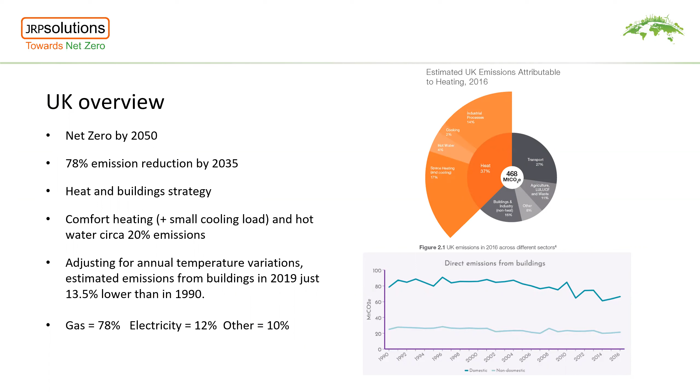As you can see, we've got a long way to go, particularly as gas is used for the bulk of heat, with electricity accounting for 12%. Gas accounts for 78%. So gas is the big challenge here, I guess, to try and displace that. Next slide, please.

So heat is either in scope 1 or scope 2, i.e. self-generated source of heat. Steam or hot water boilers would be scope 1, whereas bought-in heat would be, for instance, from district heating schemes. Heat used by an organisation's suppliers, however, would be part of that organisation's scope 3 emissions, i.e. it's their suppliers' scope 1, scope 2, but it is your own organisation's scope 3 emissions.

We would say this anyway for anyone considering investment in any sort of capital project: look at system optimization and energy efficiency measures before diving into investing large sums of money in capital projects. And when you're considering any technical solution, you should very much take into account the impact on your own net zero journey and your ability to achieve your net zero ambitions.

And lastly, I would say there are no silver bullets. We had a conversation yesterday with a large paper manufacturer who very much was pinning his hopes on hydrogen being their silver bullet. But in our view, and I'll leave Barnsley to talk about this in a little more detail later, we're quite a way away from hydrogen being that silver bullet. So you have to deal in today's realities, what's practical and what's going to actually work in the next 5 to 10 years, whilst keeping an eye on emerging technologies, of course.

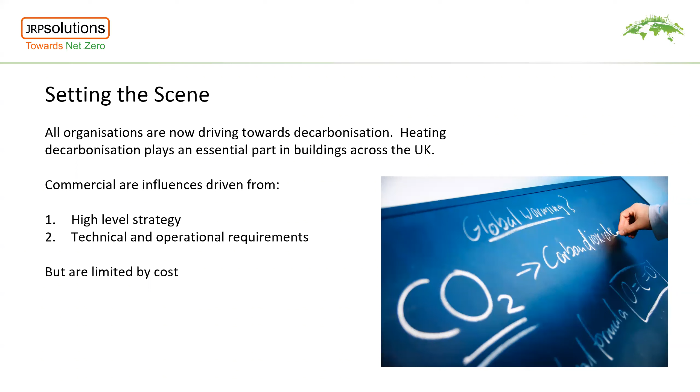As we've heard from George, all organisations are now driving towards decarbonisation, and heating, be it for industrial use or commercial space heating, is going to play an essential part across the UK and a challenge to all organisations. In making those decisions from a commercial perspective, there's usually two influences or drivers. One is high-level strategy, driven down from the board level through an organisation to demand certain aspects and returns. The second is more practical, ensuring that technical and operational requirements are being delivered. But in the context of decarbonisation, and any change in investment, there's always a limit to cost. Next slide, please.

So from a high-level strategy point of view, most organisations have started to go on the journey to net zero and set various targets. In reality, a lot of organisations have already set targets in terms of reducing carbon, challenging how people operate their plant and equipment to generate heat. The strategy will also largely dictate: we need to make cost reductions, we need to make savings, how can you improve performance? And at the same time, it's improving compliance and maintaining security.

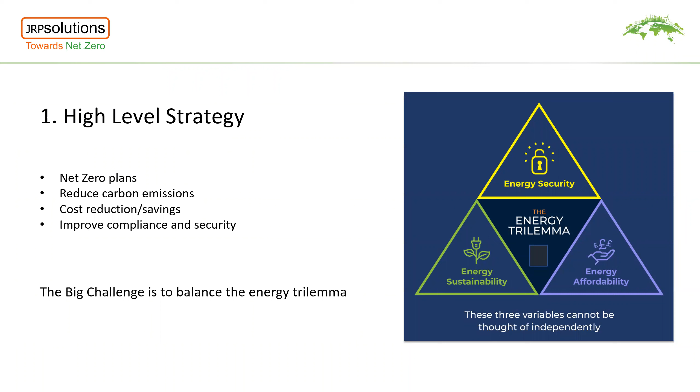So all organisations from a commercial perspective certainly have big challenges ahead, especially trying to invest in low carbon and decarbonisation technologies, while trying to balance the energy trilemma of maintaining energy security, energy affordability, and energy sustainability. Next slide, please.

In making decisions and operating systems, technical and operational requirements are key to any operating business, be it generating heat for steam or for space heating, always trying to improve operational performance to meet your high-level strategies. But there's going to be pressures to replace existing and aging plant, and decisions are required at that point. What plant do I replace it with? In the context of decarbonisation, it's important to think about how you replace that plant and equipment and how it impacts on your carbon emissions.

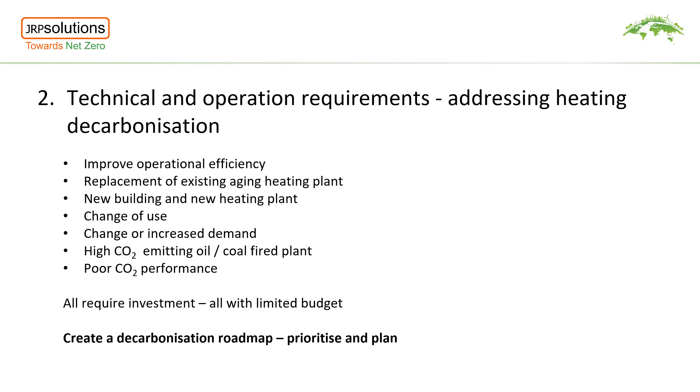At the same time, over the last couple of years, certainly during the pandemic, all organisations are now facing changes in heating demand, largely because of use of space heat and use of buildings. And so again, it all becomes a challenge. So what we suggest is you've got to create a decarbonisation roadmap so that you can prioritise and plan. I believe that's the best way to tackle this net zero journey. Next slide, please.

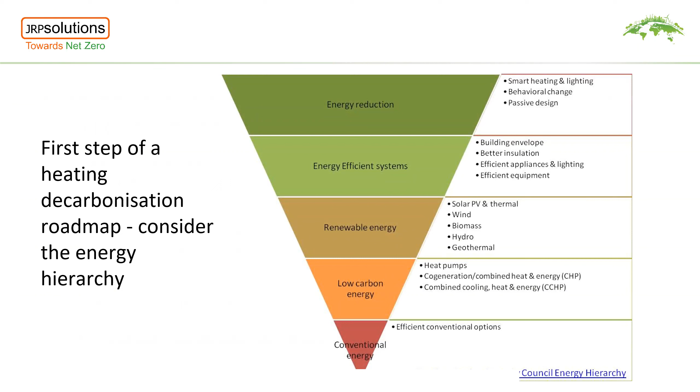So the starting point and the first steps, and as we've heard to some extent from George, is looking at the energy hierarchy. So optimising your use of energy within your buildings, within your industrial site, to improve performance by optimising, turning plant down, making sure your set points are set correctly, and reducing your energy consumption, therefore reducing your carbon emissions to an optimum such that you're matching your thermal demand that is required for your site.

The second step, obviously, is to look at improving efficiency. So in the case of heating in buildings, perhaps look at your building envelope, look at where you could improve the insulation, perhaps look at how you could improve maintenance on your plant and equipment to improve efficiencies, before going on the journey to invest in renewable technologies or low carbon technologies, which require significant investment, and ensuring that you get it correctly sized at this point in time. Next slide, please.

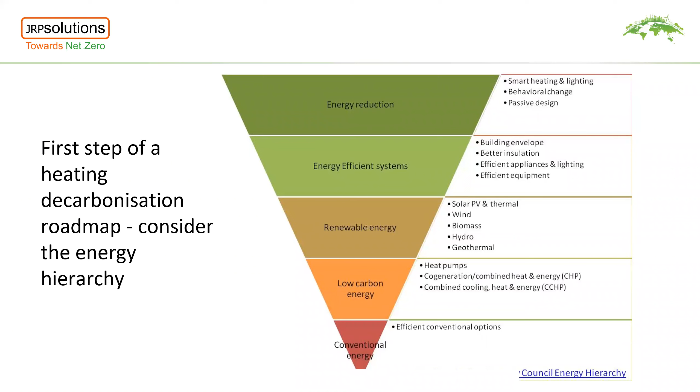So in order to optimise your decarbonisation plan, it's important to set out a plan and prioritise. And by doing this, it's important to assess and understand exactly what plant you have got, how it's generating its heat, how it's using its energy, so you can evaluate its CO2 emissions, set your targets and understand what your trajectory is. It's important to use metering information and monitor your consumptions over a period of time, such that you can make valid and sensible commercial decisions. Equally, it's also important to consider your future heating requirements, such that you can build that into any investment you make going forward.

By understanding what your current position is, you can start to prioritise. So you can start to improve your energy and CO2 performance, you can start to undertake those energy efficiency measures to ensure that you're not wasting your investments. And then you can look to replace the high CO2 emitters and replace your aging plant in an appropriate, planned and sensible manner. Next slide, please.

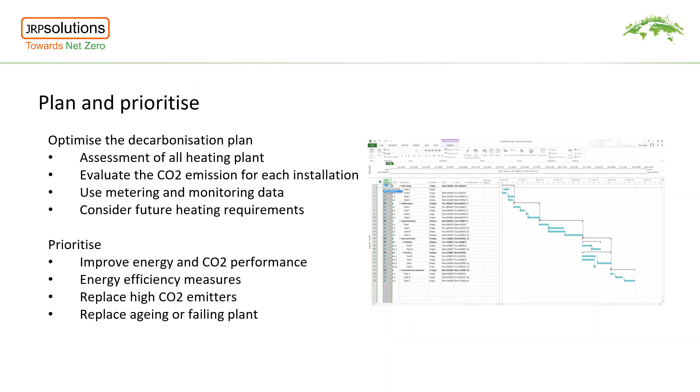What it is important to do, however, is to avoid the white elephant. We've seen a number of projects over recent years where the homework hasn't been done. Companies or organisations haven't fully understood what their heating demands are or their heating profiles, and as such they end up installing plant and equipment that in 5 years' time or even immediately is not fit for purpose, not meeting the requirement. Especially when you're starting to go on the decarbonisation journey, it's important to make those decisions with a full understanding of what you're doing.

Other aspects that are important to consider, especially with changing technologies, are the constraints and limitations. So make sure that if you need to obtain planning permission, you do so. And equally understand what your electrical supply capacity is, especially in the electrification of heat. There are going to be challenges or constraints on your supply capacity, which could cause you to increase your grid capacity, and therefore plan accordingly. In the same way, I've seen a number of projects where design and development has gone considerably down the path of implementation before someone's flagged up the fact that they haven't got enough grid capacity, and they've got to go back to the DNO and request further supply capacity, which clearly impacts on capital and time.

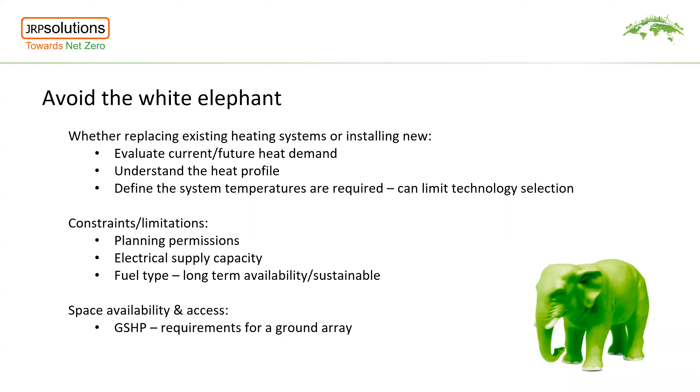Equally, the third point on there is if you're choosing something like biomass or biofuel and you're changing your boilers or your systems accordingly, ensure that you understand what your long-term availability for the supply of that fuel is. It's important that you don't install new equipment under a decarbonisation practice that ends up with no fuel in 5 years' time. Next slide, please.

So from a commercial perspective, and taking into consideration the drivers and the requirements of any organisation, clearly cost is the principal aspect. And it's important to understand what your capital budgets are, because they could actually dictate the solution that you choose. Because as we know, low carbon solutions tend to have higher capital costs than the conventional technical solutions that we're enjoying today.

What is also important, and we very much stress, is to understand the whole life cost of any project, such that you can build a business case, understand what the projected energy consumptions will be for the new technology, what the operational requirements are, and the service and maintenance. Things like biomass boilers, for example, will certainly require more operational input than perhaps a conventional gas-fired boiler, certainly for space heating. And in certain cases, if you're evaluating different technologies and developing your decarbonisation roadmap, it's important to sometimes set an internal cost of carbon, such that you can judge different technologies in that way.

Other things to consider, and we're still waiting for the government to really jump on board, but there are certainly opportunities or incentives and taxes. We know that in the public sector, there's the Public Sector Decarbonisation Scheme and grant funding that is available. And for heat networks, there's the Heat Network Investment Programme, which is going to transform into the Green Heat Network funding. But in due course, we expect the government to either impose further taxes on carbon or hopefully to develop incentives. So make sure you're aware of those when evaluating your cost and business plan assessments. Next slide, please.

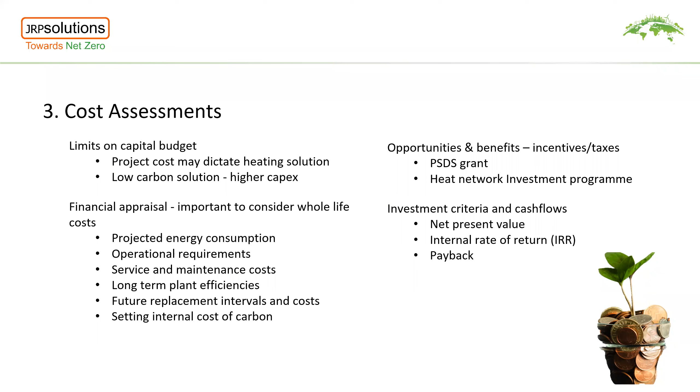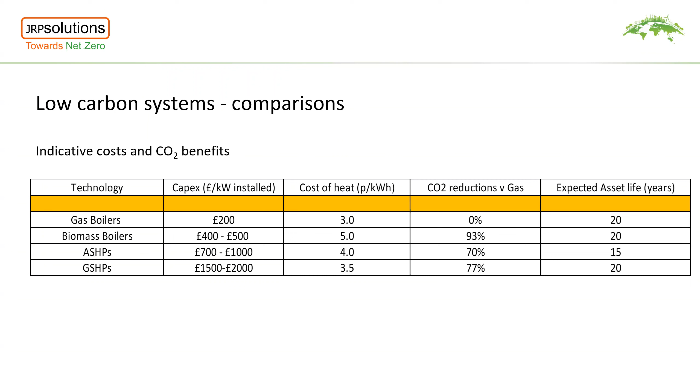This slide gives an illustration of some typical parameters or metrics that we have evaluated over the last few months associated with capital costs and cost of heat, CO2 reductions for different technologies, and gives a good illustration of how different the costs are with those low carbon solutions. Next slide, please.

What this shows is that, as we all know, decarbonisation of heat can be achieved, generally with proven technologies. We've still got challenges with high temperature requirements such as steam, but in the majority of cases, especially for space heating, low carbon systems through heat pumps can achieve greater than 70% reduction in CO2 and more efficient energy usage.

But the big challenge we have currently is that gas-fired boilers or existing technologies generally have a lower running cost from an energy perspective and generally have a lower capital cost. So when trying to convince boards to replace plant and equipment, it's always about thinking about the balance and the transitional period. So finally, just to suggest that net zero is a journey. So what is important is to set a decarbonisation roadmap and plan and prioritise your actions.

Thank you very much. I'm going to hand over to George Barnes now, who will talk more about the technical solutions. Thank you very much, Simon. Hi, George Barnes here, consultant with JRP, and I'm here to talk about the meaty part and get to the heart of the matter. So next slide, please, Rob.

So we've touched on this already. You're very aware we need to get to net zero by 2050 with intermediate pressures and targets up to there, with the sixth carbon budget recently being released and other legislative requirements such as gas boiler phase-out by 2025, requiring a bit of outside of the box thinking for newer builds. We know that heat is a massive challenge for decarbonisation. The electricity decarbonisation of the grid has been steady and effective, especially since 2014, as we'll look at over the next few slides.

And each of these heat decarbonisation applications have their own unique problems. There's no one size fits all. Don't fall into the danger trap of those group of people in the bottom right corner seeing the heat pump evaporator and the heat pump system as the magical solution. There isn't one, and each heat using application will have pros, cons, and restrictions, and that's what we're going to explore in the following slides. Next slide, please, Rob.

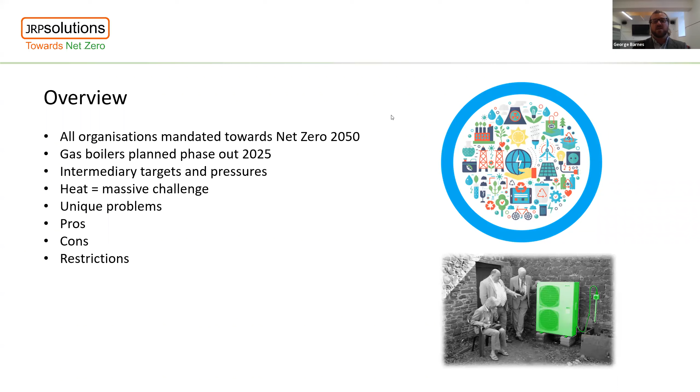So this is a reiteration of the earlier slide George used to set the scene. I'm not going to focus on the top 3 bullet points, but what I will discuss is that heat accounts roughly for 37% of our total emissions from the UK. Admittedly, that analysis was done in 2016, but it still rings true. And of that, heating and hot water is about 20%, so the remaining 17% roughly is industrial heat.

And what we do know is direct emissions from buildings from 1990 to 2019 are in totality only 13.5% lower than they were. The majority of that is from the decarbonisation of electricity. Hence the decarbonisation of heat has been a massive challenge historically and shall be in the future. Next slide, please, Rob.

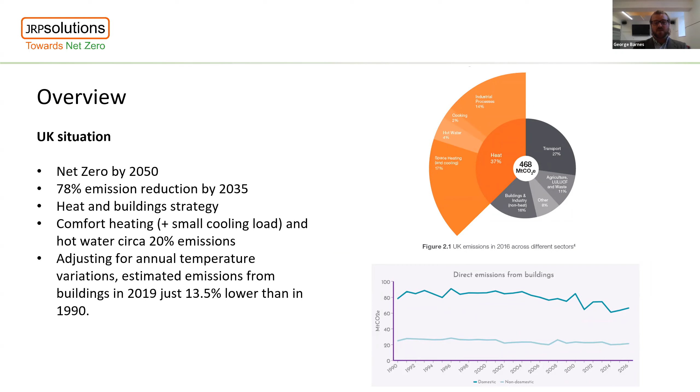What this graph shows is the energy and emissions projections from BEIS starting in 2019, moving up to 2040. You can see that the renewable share of electricity generation by fuel source is set to increase even further. Natural gas decreases steadily up to 2030 and then plateaus. Imports and nuclear are set to increase, not dramatically, and coal flatlining, with some carbon capture and storage with natural gas.

What this tells us basically is that the grid intensity, which is the emissions of CO2 associated with a kilowatt hour production of electricity, is set to fall even further, therefore making electrification a favourable option for heat from an emissions perspective. Next slide, please, Rob.

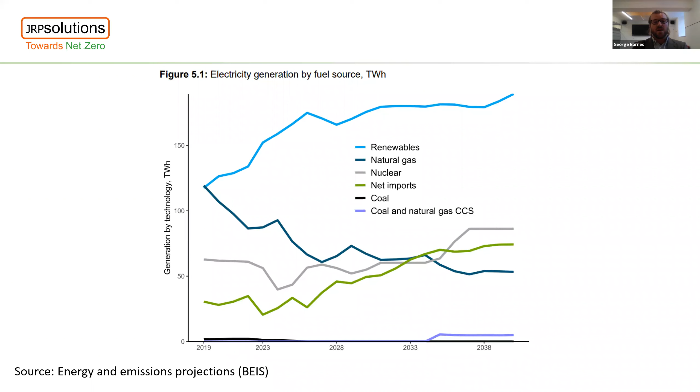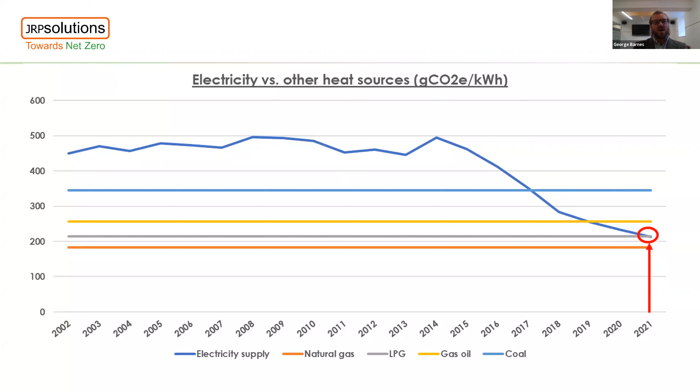And it's telling us that for each kilowatt hour of electricity produced, electricity is now more efficient from an emissions perspective than coal, gas oil, and LPG, but not quite natural gas if you're considering direct combustion, and that's due to the inefficiencies of electricity generation from natural gas on the grid still. And the next slide, please, Rob.

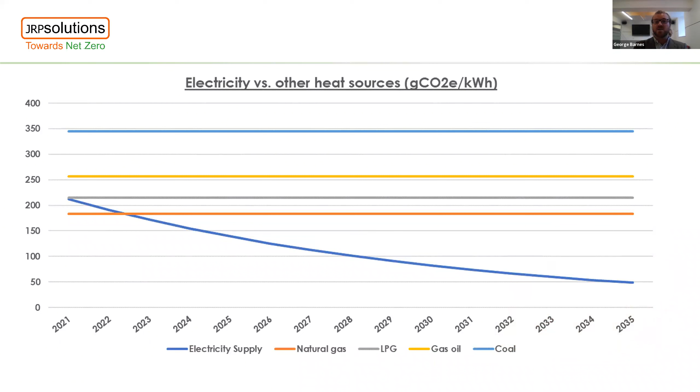We can see that I pulled out a very crude projection using the last 3 years average reduction in grid intensity moving forward up to 2035. And that indicates that by 2022, 2023, the grid emission factor will have fallen below that of natural gas. So therefore, direct electric heating will be even better from an emissions perspective than natural gas. Quite a crude estimation. You'd probably expect that to be more of a staged approach, and I would assume it would level off at around 50, 60, 70 grams of CO2, even when the grid is decarbonised as much as it possibly can be. So next slide, please.

So these are the issues that we assume most of you are facing. There's the issue of technology. Technology is an issue, but as Simon mentioned, it's lesser so than some of the others. You know, if you were to try and decarbonise your comfort heating, for example, you probably could do it. However, there'll be constraints on each of these technologies and limitations. It would very likely be expensive to do so now, and especially in the industrial setting, you'd have to think outside the box quite a lot, especially if using high pressure steam, for example.

There's the issue of timing. When do you do this? Especially if you don't want to have a break in production, or if you've got high occupancy buildings, when do you rip out your main boiler plant and replace it with lower carbon alternatives? And then you've got the issue of buy-in. How do you persuade those with the purse strings to replace existing, for example, well-run and cheaply run natural gas-fired boiler plant with more expensive alternatives by developing examples, really strong business cases or putting on other strings. So there's the issue of buy-in there.

And then finally, you have internal pressures and external pressures. You have the internal pressures of, for example, your group, your targets, you've set science-based targets already, you have those pressures, and then you have your external pressures as well from potential clients, for example, government, media, etc. So they're the issues that we're trying to overcome. Next slide, please, Rob.

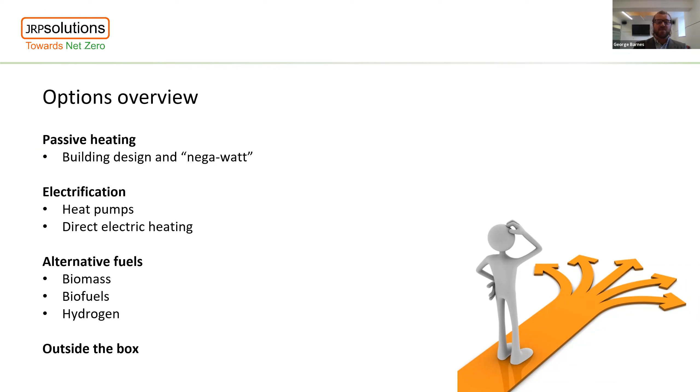And these are the options we're going to be looking at today, the actual technical appraisal. Not an exhaustive list by any means. We're going to be looking at passive heating first and foremost, electrification and alternative fuels, and then we'll have a bit of a view of outside the box or other ideas that aren't covered in there. There's a lot of information in these slides, and I do apologise for having to go through them in a relatively fast time. Please do ask any questions at the end or put them in an email afterwards, and we'll be happy to answer them. Next slide, please, Rob.

So first and foremost, passive heating. The most efficient watt is the one never used, the old cliche, the negawatt. Passive heating is essentially just extremely efficient building design. We've all come across passive house and other examples of this, building in solar chimneys, large glass facades, and facilitating good natural convection inside to make sure that there's a balance of heat. The pros of this is if it's done really well, there's no energy consumption, i.e. there's minimal input, mostly from the sun, and minimal maintenance because there's no plant to have to maintain, ideally.

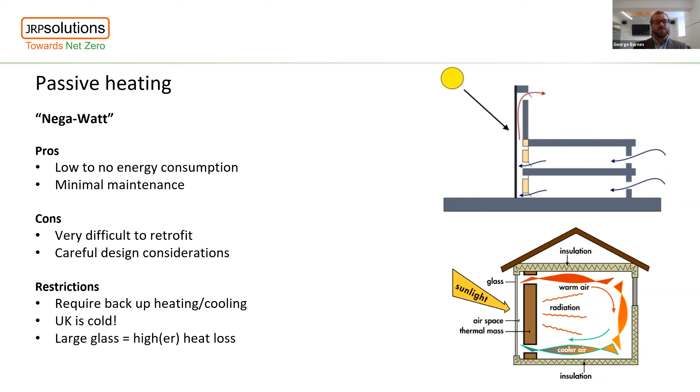However, these solutions are very difficult, if not impossible, to retrofit, so it has to be done at the design stage. You can't put a green Lego brick into a red brick wall. You have to knock it all down and start again. So it needs to be done right at the off. And restrictions of these technologies are that the UK is very cold. You're likely to require backup heating and cooling, and if poorly designed, as covered in the cons, your building itself can be a big heat loss rather than a heat gain and store. So it needs some very careful design considerations from the get-go. Next slide, please. So the big one generally is electrification.

Heat pumps, how do they work? They're essentially fridges in reverse. So bearing that in mind, they use refrigerants. So a refrigerant is compressed and condensed. When that happens, heat is produced, that's then transferred to liquid or to air. That then goes through the evaporation cycle.

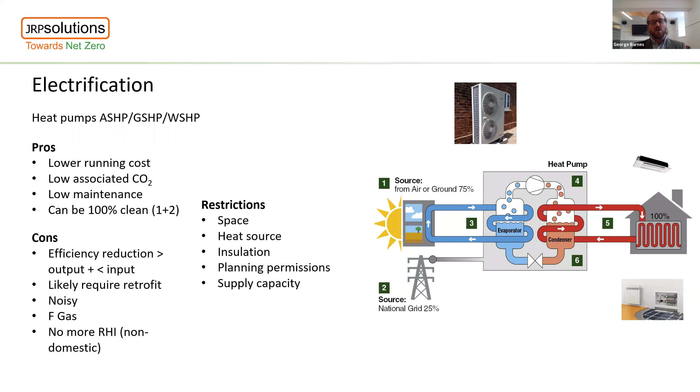There's an endothermic cycle, and that absorbs the heat from the refrigerant, and then that is therefore either expelled or can be reused, as would have been in a fridge, the opposite way around. And the properties of refrigerants, generally when they're compressed, they have a 100% plus efficiency ratio.

So for example, air source heat pumps have a general efficiency of say 300%. Ground source and water source can be up to 400, 500, 600% efficient, of electricity in versus heat out. And therefore they have much lower running costs than direct electric heating, for example, and associated

lower CO2. So if you cast your mind back to the grid emission factors, so that's the emission of electricity, divide that by 3 or 4 for the 100% plus efficiency effect. Heat pumps also have low maintenance. You can generally plug in and play, a bit like air conditioning systems with leak tests, but generally they kind of do their thing without too much intervention.

And they can be 100% clean if that electricity is generated on site from guaranteed renewable sources or a direct line PPA. We're not talking about having green contracts here. We're talking about direct electric generation. Cons of heat pumps then.

So the higher the heat output and the lower the heat input, the less efficient the heat pump is. Heat pumps like a stable source of heat inlet as well. Hence that's why ground source and water source heat pumps have higher efficiencies. They have higher heat input temperatures and they're more stable than air. You're likely going to require retrofit.

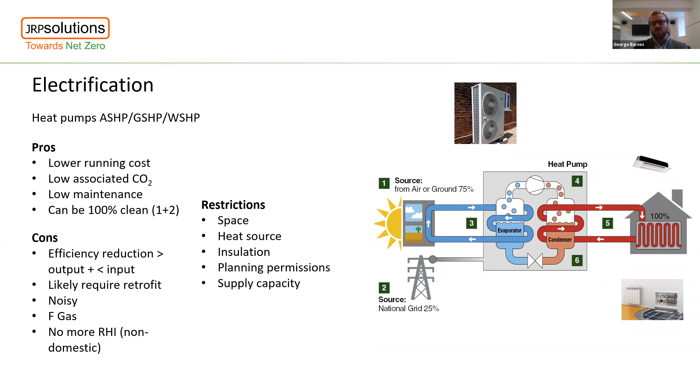remaining being topped up by gas, because 50% of the capacity generally will allow for 80% of your heat requirements throughout the year, and then the extra 20% top up. Reason being, heat pumps are expensive, they require lots of space, etc. So therefore, from an economic perspective, it makes more sense to install the majority of your heat load from heat pumps, but not the total amount.

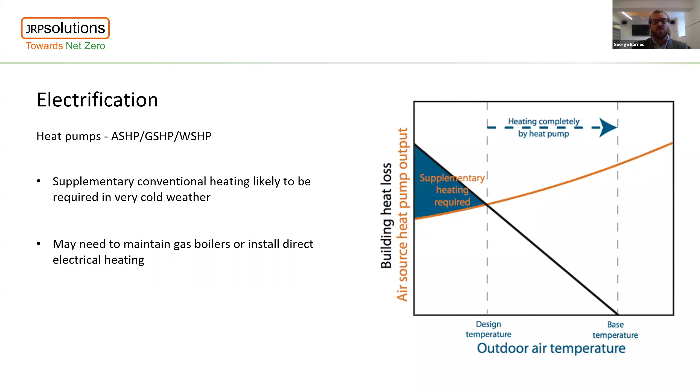So safety being flammability, safety being toxicity. A lot of these refrigerants are flammable. So if replacing or thinking about replacing, for example, R404A with R32, which is another common refrigerant for heat pumps, you couldn't do a like-for-like swap, because R32 is much more flammable than R404A, and it could likely catch fire in the system. So you'd have to do a complete replacement. So that's a consideration, especially when thinking about retrofitting F-gases.

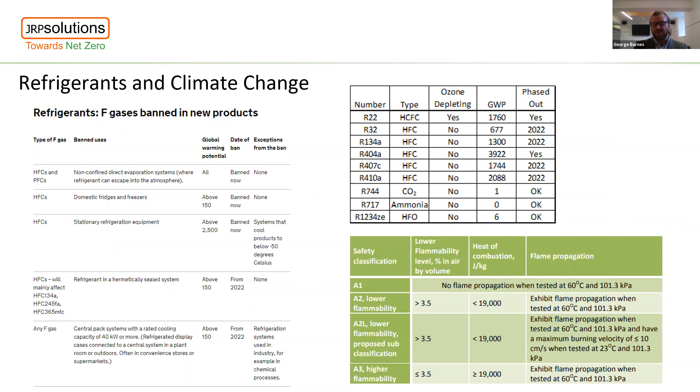So here, one of the newer gases to be used as a refrigerant. It's been around for a while in the larger capacity heat pump areas, but on the smaller systems, it's CO2. And CO2 is a very good refrigerant for higher temperature processes. Generally heat pumps operate at lower temperatures. CO2 can operate at 65 degrees C plus, so it can be used for hot water generation, and can also be used for retrofitting existing natural gas or oil boiler plant, for example, if you have a flow temperature of 60, 70, 80 degrees plus.

Not necessarily incredibly efficient in comparison to the lower level heat pumps if operating at the high temperatures, but nevertheless it is possible. A nuance of CO2 as a refrigerant is that it prefers a large temperature drop across the condenser, so it prefers a lower inlet temperature with a relatively higher outlet temperature. So if you're thinking about using CO2 as a refrigerant in closed loop domestic heating systems, you should really use as much of that heat as possible in the circuit before coming back into the heat pump itself.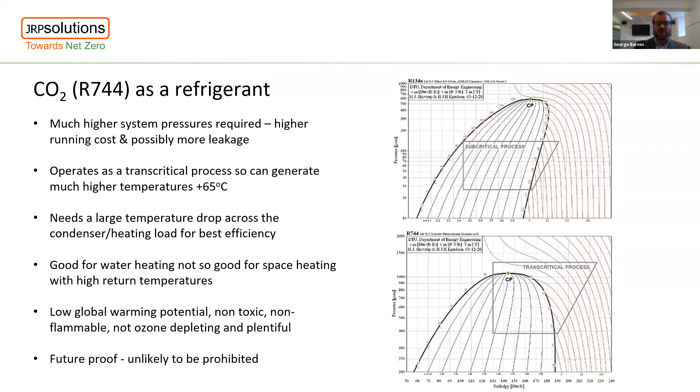Cool. We've gone back to the beginning. That's fine. I'm not going to discuss these slides. A few more. A few more. Next. That's it. Thank you very much, Rob.

So this is an example of where a heat pump system has been installed to extremely efficient measures. In Budapest military hospital, sewage water was used as the heat source. It's a secondary transfer medium, so you wouldn't be putting that straight into your system, but that heat would be transferred to the refrigerant, and it has a stable temperature, which heat pumps like, if you remember, and a high temperature of between 10 and 20 degrees throughout the year.

This matched with a low outlet temperature of just 32 degrees and large heat transfer mechanisms made a very efficient system with a COP, or an efficiency, of 650 to 710% for every kilowatt hour of electricity in versus kilowatt hour of heat out. So it just shows, with careful consideration and design, these heat pump systems can be extremely efficient. Next slide, please.

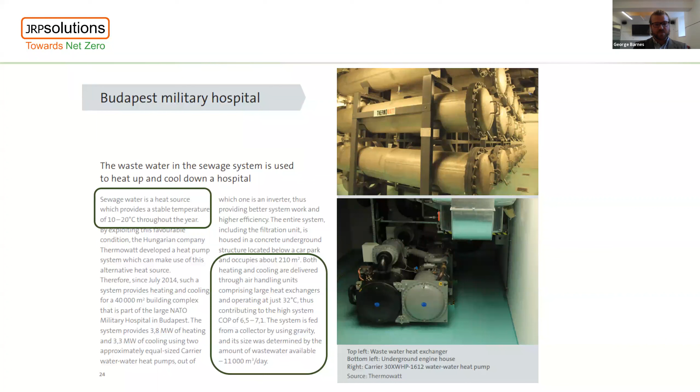So on to direct electric heating. It's not preferable, but it has its place, as for example, that organisation I mentioned earlier with the restrictions on planning. It's got lower associated CO2 emissions currently than, for example, LPG or oil or coal. So relatively low CO2 emissions in direct point of use. Again, can be 100% clean if generating renewable electricity on site.

They generally have a lower installation cost, so a wall mounted radiator will cost you 150 quid to put in, and you plug it and play and leave it going, compared to some of the higher installation costs of other technologies. Direct electric heating can be a good heat sink if, for example, you've got a solar array on site and you don't want to install a battery, you can use the hot water in the heating system as a heat sink there, and use that as a hybrid system.

And one application where direct electric heating is actually quite useful is in infrared heating. That being the case because infrared heating heats the person or the object, it doesn't heat the space. And therefore, if you've got big drafty warehouses or halls or thoroughfares, infrared heating is better than other sources of space heating.

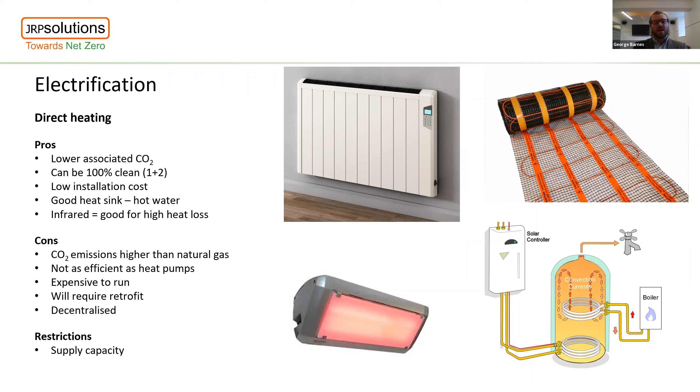So alternative fuels. First and foremost, biomass. Biomass wood chip has a bad rep generally. I wouldn't say it's not deserved, but that's not because of the technology. It's because of the way these technologies have been commissioned, maintained, and operated. As a principle, biomass burners can be very effective. They're carbon neutral, technically, if you have a good heat source and you're just taking out as much from the air as you're putting in, if not more, and burning from woodland that wouldn't otherwise have been created. So technically, with that logic, they are carbon neutral. Can be relatively cheap fuel compared to oil, for example, and electricity if you're direct electric heating.

Cons being the renewable heat incentive again is gone, and this was a big price support mechanism for biomass boilers. And we're not entirely sure what's going to be replacing that, if anything. There is talk of an upfront CapEx grant, but only to the maximum amount of £4,000, which is negligible compared to how much renewable heat incentive these pieces of plant would have been receiving otherwise.

Again, alluded to earlier, operational management and niche maintenance, they're quite technical pieces of equipment. So maintenance isn't as simple as plug in your gas boiler and let it run. You need to maintain the insides, the burner, the auger. There's quite a lot that needs to be regularly maintained. And you need someone to manage them operationally; the wood source needs to be checked and stored regularly with moisture content constantly monitored. Deliveries, for example, need to be sorted and stored, and it's a bit more management than would otherwise be for electric or gas or oil alternatives.

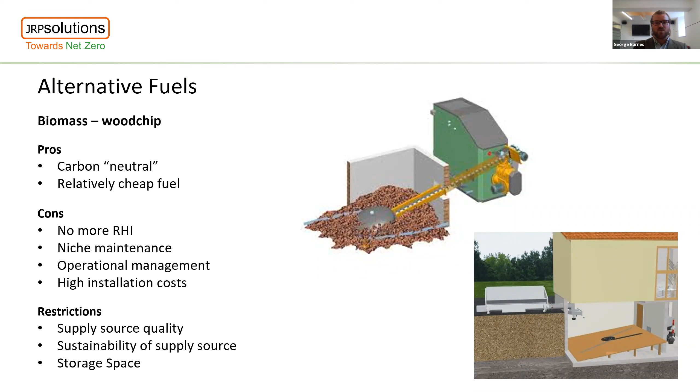And then you also need to be considering how long are you going to be getting that wood for. So locking in a supply contract for a good length of time, preferably for roughly the same amount of time you foresee having the boiler. And finally, storage space is a restriction. If you're in central urban areas and you need to store large amounts of wood chip, you're going to struggle. So probably not a suitable application.

Next slide, please. So biofuels, very similar to biomass. They have similar considerations, similar pros, similar cons. Pros, again, can be carbon neutral for the same principle as biomass, and relatively cheap in relation to direct electric heating or oil, for example, if sourced well.

Another pro is currently they can be used as a blend or a drop-in for a kerosene alternative, especially from a blend perspective. It's thought that up to 20% of HVO or RME, HVO being hydrogenated vegetable oil, or RME, rapeseed methyl ester, can be blended with gas oil, kerosene, and put into conventional boilers. But do check with your boiler manufacturer before you do so, evidently.

And there are studies going on where I live in Cornwall currently. There is a local community that has replaced its kerosene fuel with HVO, hydrogenated vegetable oil, and they have had no issues whatsoever. It's been going for about a year. So therefore the application does work on a smaller scale, but there's nothing larger scale of that ilk as of yet, but hopefully in the future maybe so.

And I put AD gas there as well. So AD gas, anaerobic digested gas, generating gas from waste feedstock, for example, food or sludge or other waste materials, and utilising that gas in a boiler is a great option if you can. Quite unique and quite niche applications and operations for doing so, but especially on larger manufacturing sites. I've seen a few of these, for example, cheesemakers, where they utilise this very well, and I'm also working with a cider company currently to investigate. So good for the manufacturing side.

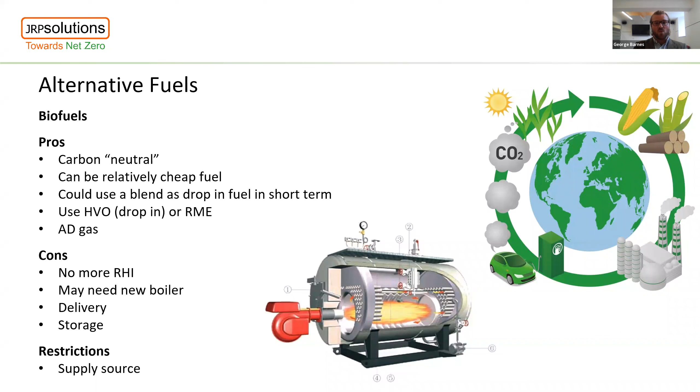And so finally, supply source, main issue, same with biomass. There have been stories recently of biofuels being mixed with 50% non-sustainable palm oil. And also we've got the monoculture cropping issue of soya, for example. So if you are to go down the biofuels route, make sure you know where your fuel is coming from. Next slide, please.

Finally, on the alternative fuels slide, probably the most contentious of all of the fuels, hydrogen. You may or may not have seen that the government released its hydrogen roadmap last week. And general consensus is that 10 years at a minimum, I would say, before any sort of hydrogen is available for commercial use properly. There are industrial sectors where it's being trialled.

And on the industrial vein, I would personally envisage that hydrogen would mainly be used for industrial processes, so steel, cement, and high pressure steam, for example, and potentially the decarbonisation of transport.

However, I wouldn't hold your breath for using hydrogen as a comfort heating source, at least not for a very long time, if that's the way you want to go. But nevertheless, it is a good fuel. You can't knock hydrogen in itself. It's got no point of use emissions. It's got low to no associated emissions if made correctly and well. So through electrolysis, if made from renewable electricity, it's got no associated emissions, or with good carbon capture storage.

It's very abundant. You're not going to run out of hydrogen. It's the most abundant element on our planet, so it's not going anywhere. And one of the big pluses is you can retrofit hydrogen burners to existing boiler plants, especially in the manufacturing sector when you're using natural gas currently, where that is such an issue in the future potentially when you're looking to change that boiler plant, especially if you're using steam.

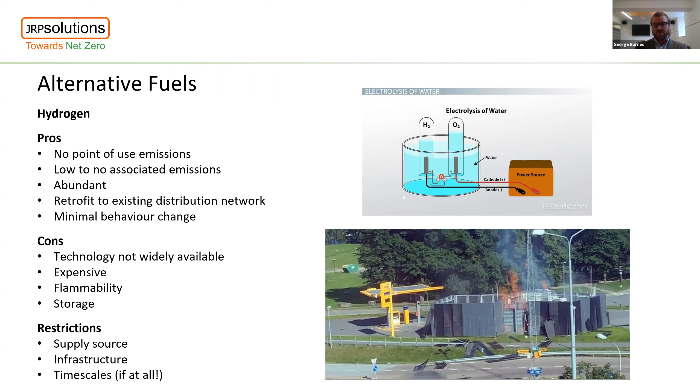And the timescales for all of this to come to fruition, as I said, 10, 15 years, I would say, personally, on my head, if at all. So don't hold your breath. Next slide, please.

Finally, on the technology side, district heating, not necessarily its own technology, but a mixture of these. District heating is a centralized plant, an energy center that contains a mixture of combined heat and power plants, biomass, energy from waste, for example. That's then distributed through a network of pipes, and you pay a set pence per kilowatt hour for connection to the network. Pros of this being that generally, historically, these were a low carbon or lower carbon heat source than localized natural gas plant, because they employed these lower carbon technologies that weren't readily available. And if they don't or didn't, they can easily be retrofitted to low or no carbon heat sources in the future.

Another pro is that they are operated by a third-party system, so you don't have to worry about any of the maintenance or the operation. And because they're operated by a third party on a large scale, the operational costs are generally lower than if you were going to maintain your own plant. Cons being generally expensive at point of installation, therefore that can be reflected in the pence per kilowatt hour cost you pay in the long run. They generally have higher system heat losses because they've got the large distribution network for heat to be lost through.

And I've got the third-party system now as a con as well, because although you're not liable to maintain or operate the plant, you have no say on what's going on. So once you pay that pence per kilowatt hour, it's basically out of your hands.

So finally, on the technological side, other options: thermal solar PV. I haven't included that because I couldn't fit it in any of the other considerations. Nothing wrong with it at all. It's a good technology, especially for usage in hybrid systems by heating water sent to a centralized buffer tank and then used in a combo system.

Deeper geothermal. So if you have a look to the bottom right there, there's an illustration of varying heats from varying strata in the earth. If you're lucky enough to live in the northeast or the southwest, that's even more increased due to the bedrock of granite and other rocks. So you've got potentially a decent heat system there for you. Mine water energy as well. Disused mines that have been flooded are generally a very good heat source. So if you're near any old mining communities, that's worth investigating.

Smaller scale CCS, being carbon capture storage. Carbon capture storage, again, quite niche, currently under development for large scale projects, nothing really for smaller scale. When I say smaller scale, I'm talking energy center size, big CHP units, combined heat and power units. Maybe in the longer term, in the 10, 20 years, I've read a few papers suggesting that it can be done, but something for the future that may or may not happen.

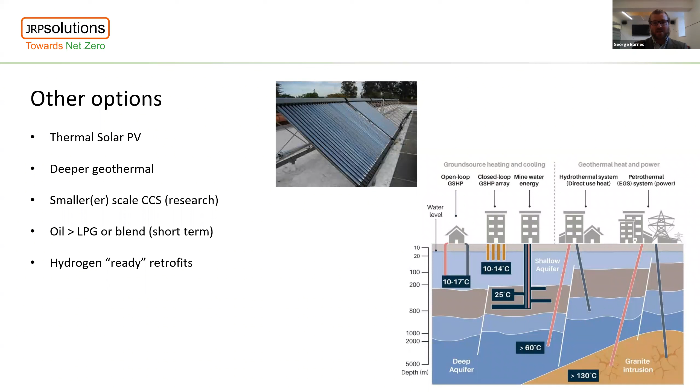And finally, hydrogen-ready retrofits, not waiting on hydrogen itself, but installing boilers that can potentially be combined with hydrogen in the future with a dual burner. Especially I know with people who are replacing steam boiler plant now, they're thinking about retrofitting with hydrogen-ready burners. So that is a potential option if your plant's going to be there for 10, 15, 20 years. Next slide, please.

And that's essentially me. In summary of what I've said, the most efficient watt is the one that's never used. It runs through the theme of the whole webinar. Make sure your plant, or your building, is as efficient as it possibly can be and airtight prior to any retrofit or replacement of heating. The technology does generally exist. If you want to decarbonize comfort heating, you could, but it's expensive, timely, and has other restrictions. Less so potentially for manufacturing. It takes a bit more outside the box thinking.

Each application is unique. There's not one size fits all. There's going to be a combination of each of the technologies. It's thought that electrification will potentially account for maybe 50% moving forwards as a rough estimate, but then that other 50% of heat decarbonisation needs to come from somewhere else. So that could be the biofuels, it could be the hydrogen, it could be one of the other outside the box technologies. So think outside the box, and the final takeaway message is commissioning is key. Don't leave stranded assets, don't leave white elephants, don't install expensive complex plant and then put in poor supply contracts or poor maintenance contracts and waste a lot of money.

So where to next? In terms of decarbonisation of heat, obviously there's lots of options there, and as Barnes rightly said, some are more affordable than others. The technology is there, but it might be cost prohibitive at this time, or at least some solutions are cost prohibitive at this time. Hydrogen is quite an interesting one, as Barnes said. Some people consider it to be the silver bullet.

For me, it has fantastic potential, but I worked at BP 20 years ago and we were looking at hydrogen then, albeit for transport, and they basically chose not to develop it much further. Of course, they'd probably rue that decision right now, I'm sure. But it's interesting. Hydrogen has lots of issues associated with it, which George outlined.

One interesting application that someone was talking about a couple of weeks ago to me was for a large hospital, because obviously one of the byproducts of creating hydrogen is oxygen, and of course hospitals use a lot of oxygen, and particularly during the recent pandemic, oxygen was in short supply in some areas.

So that could be another added revenue stream and bonus byproduct of on-site production of hydrogen. But I guess that's something to just keep a watchful eye on, as we will very closely. We watch for developments in all technologies and advise our clients accordingly.

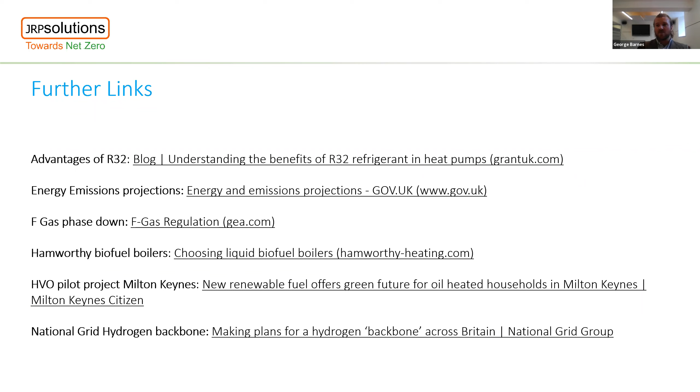Okay, and one final question then. Is it worth generating electricity from waste heat? That's a broad question. It's twofold. I'd say if you're talking about electricity from waste, burning waste, then intermittently until we no longer require it, then yes. If you're talking waste heat from, for example, CHP and steam turbines, then also yes, if you've got it in the nearer term. Simon, anything else?

No, not really. I think the answer is yes and yes, as you say, both those sort of applications. But equally, it's understanding what the commercial benefits are.